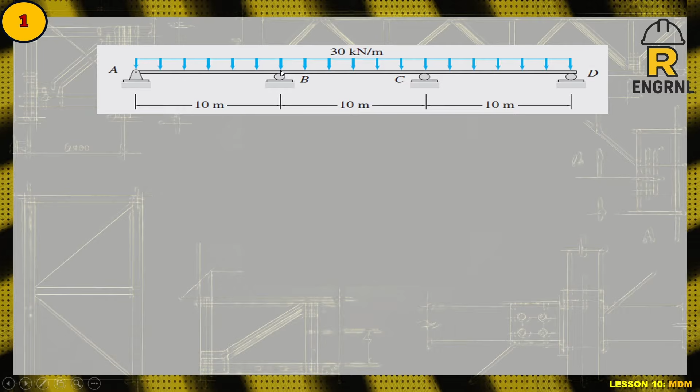This is called moment distribution method. Kagaya ng three-moment equations, ang goal niya is to evaluate or calculate the reactions at the supports. Diba? Sa three-moment equations, kinukuha muna natin yung mga moments at specific point kung saan may redundant tayo, kagaya ng point B na to and point C. Kinukuha natin yung moment dyan, tapos saka natin na kukuha yung mga reactions, support reactions. Maybe a fixed support at the end or both, no? Okay, so kung gusto nyo balikan yung method natin, three moment equation, nasa channel lang po.

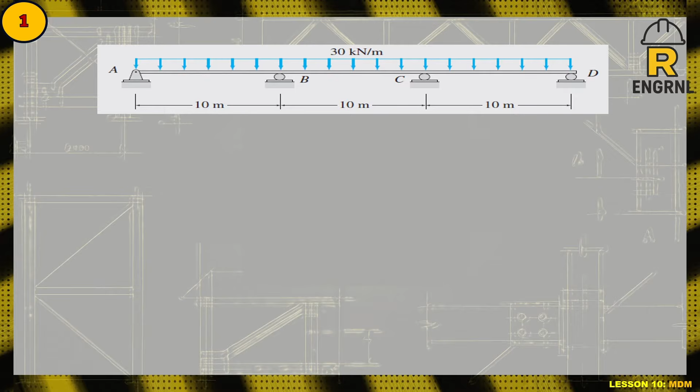So paano naman ang MDM? So this moment distribution method is an iterative method. Ibig sabihin, may portion na paulit-ulit na ginagawa dun sa pag-analyze, no, ng continuous beam. Paulit-ulit na ginagawa yung portion ng pagki-carry over at pagbabalance ng moment.

So this is considering only their bending deformations. Okay? Ibig sabihin, more on the moment lang ito. Saka tayo kukuha ng reactions.

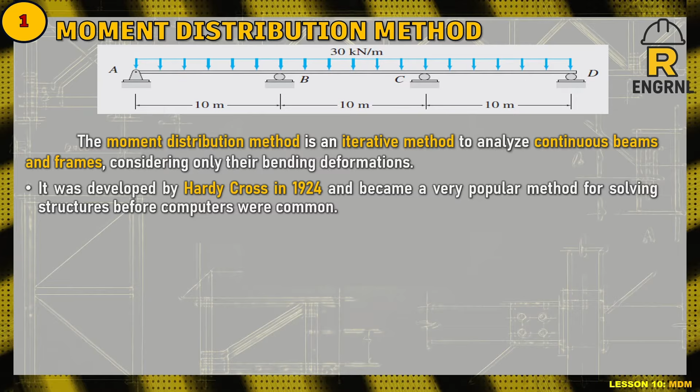It was developed by Hardy Cross in 1924 and became a very popular method for solving structures before computers were common. So from 1930s to 1960s, engineers used this method a lot because it was simple and did not require solving many equations. Okay? Simple lang daw. And when computers became widely used in 1970s, engineers started using matrix methods instead. However, the moment distribution method is still useful today, especially for small structures, preliminary designs, and for checking computer results.

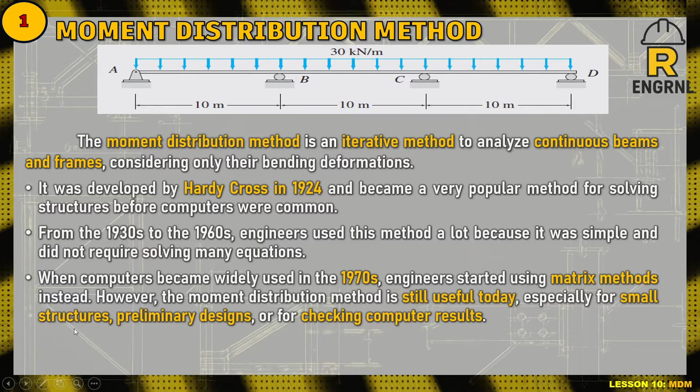So sinasabi lang dito na nagsimula talaga sa manual calculation. And this found na mas madali before, no? And the convenience niya is making it useful until now for small structures. Makikita nyo mamaya kung bakit.

So this method is easier because it avoids solving many simultaneous equations. For beams and frames without sidesway, no simultaneous equations are needed. For frames with sidesway, only a few equations are required. Pero po-focus muna tayo sa beam, no? So later na yung frames.

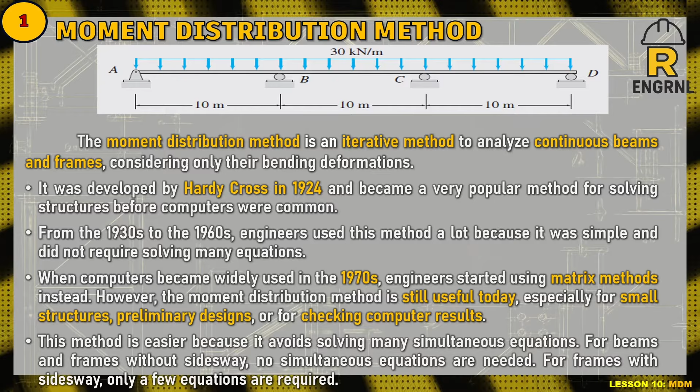Ngayon, ginagamit to manually noon, no, nung pag-analyze ng isang buong building sa frame per frame talaga, no? So makuha lang natin yung mga moments, yun na yung pinakamahalaga dun eh. Makakakuha na kagad tayo ng reactions. Pero may mga specialized technique dito sa moment distribution as the concept flows po, no? Bakit tayo nakakakuha ng moment?

So let's begin with sign convention, of course. Hindi pa rin nagbabago yung sign convention natin like three-moment equation. Susundan pa rin natin na the counterclockwise member end moments are considered positive. So this is in accordance with the Aslam Kassimali book, no? Na doon tayo sanay eh.

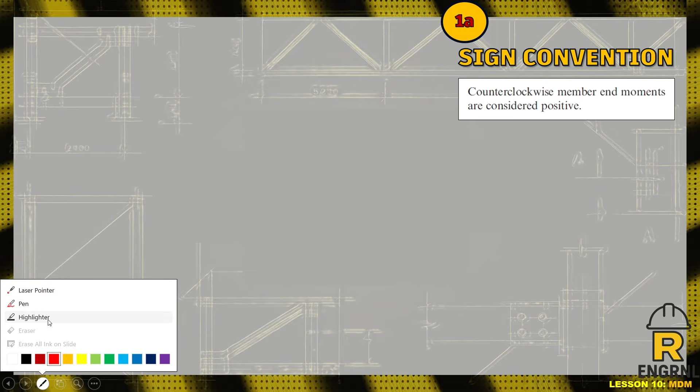The left hand will give you, if you get the left hand, diba? Kuha ka ng left hand member. So ito yung counterclockwise to be positive, no? So kung right hand member naman, mapupunta siya sa clockwise positive naman siya dito. So kapag nakakuha ka ng negative moment sa redundant point, ibig sabihin, clockwise lang yung mangyayari. No? So ganun yan. Okay?

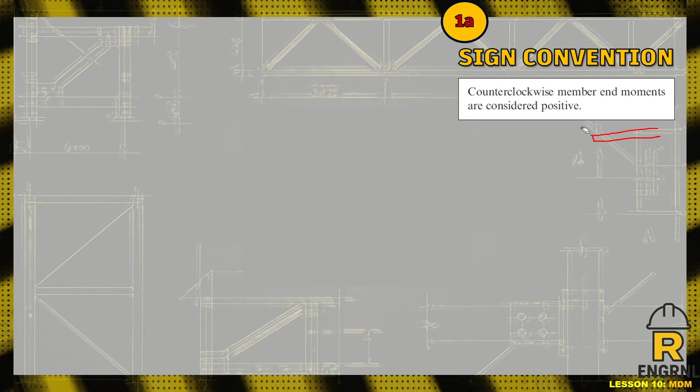And next, yung mga terminologies na ginagamit sa MDM. So unahin na natin yung fixed end moments. So nakaka-solve na kayo nito nung time pa ng Mechanics 3 or yung strength of materials, no? Na kapag ang support ay both fixed, no, may mga certain equivalent moment na yan. So na-solve na to using different methods. Para mas mapabilis ang solution natin, kabisaduhin na lang natin yung magiging moments sa left and right ng fixed end moments, no? O fixed end support.

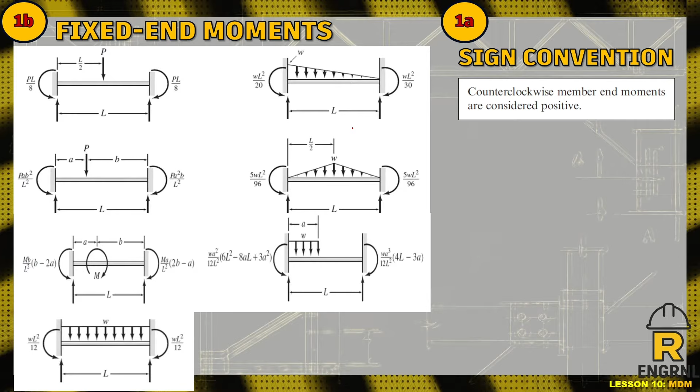So lahat ng itong fixed end moment ay magagamit natin because of the concept ng MDM, diba? Tinitreat muna natin na naka-lock on or naka-restraint lahat ng supports. Kung continuous man yung beam, lahat ng support, lahat ng span ay naka-lock or naka-restrain. And then kapag na-restrain na natin, typical, makakakuha tayo ng moment per span. Tapos i-distribute natin yan sa bawat support. So yung tinatawag na distribution is coordinated with the member stiffness. Ano naman ang member stiffness?

So, for demonstration, we have a span with a hinge at the end and fixed at the right. If we apply a load such as a moment, it will bend like this. There will be a slope at the hinge, with a rotation at A, or slope at A. So there is a moment transferred to the other support.

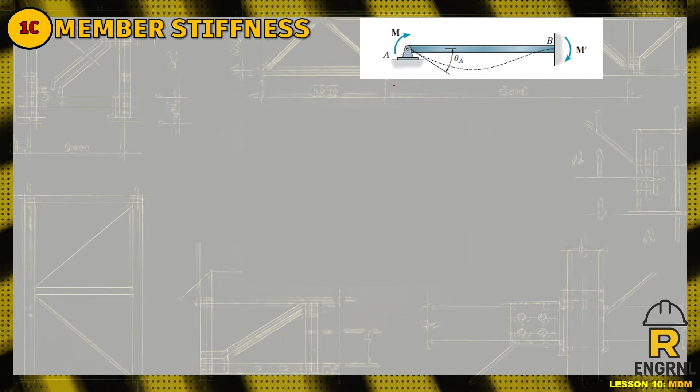Due to its rotation, the member has stiffness. When we solve this using the slope and deflection method, this is what comes out. The K now, which we call the relative stiffness, is 4EI over L. We already solved that using the slope and deflection method, so just check the previous topics in our book.

So we just remember this 4EI over L: when the point of focus is a support, like at A, the far end is fixed. That means the one next to it, whether to the right or to the left, is far end fixed, according to its definition in member stiffness.

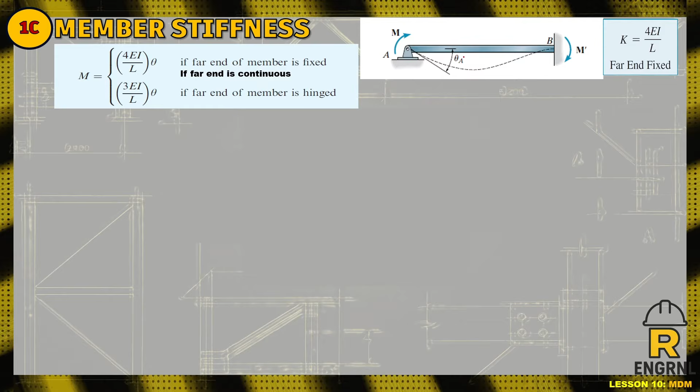Now, to simplify the formulas further, we have M, which is member stiffness, equal to two cases. So if we derive the stiffness of the member, all far ends of the member that are fixed use 4EI over L. Then we multiply it by theta, which is this slope.

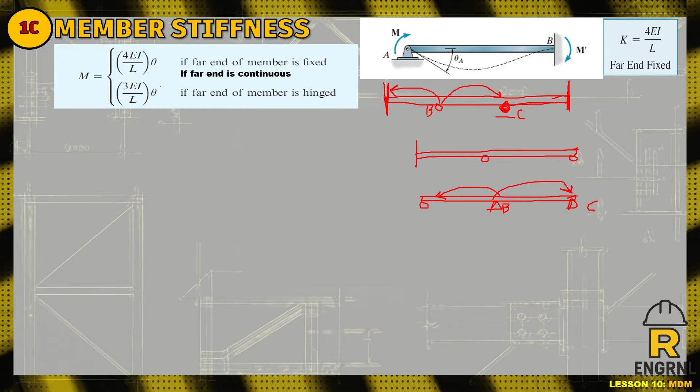So we also have what is called relative stiffness, or the member stiffness, K bar. When we set theta as 1 radian, that means the slope just cancels out, so approximately our theta plays around 1 radian. So it is reasonable to think that this is the same formula.

Now we have an alternative solution to minimize our computation, called the relative stiffness or member stiffness, K. This is the relative bending stiffness. K is equal to K bar over 4E. For example, if we divide by 4E, the 4E cancels out and only IL remains. If we divide this by 4E, it becomes 3/4 IL.

So this is for hinge, fixed, and far end continuous cases. This can work as the alternative approach, while the conventional approach is the member stiffness. There are cases where you'll see only this is actually used, like 4EI over L, whenever we get the stiffness.

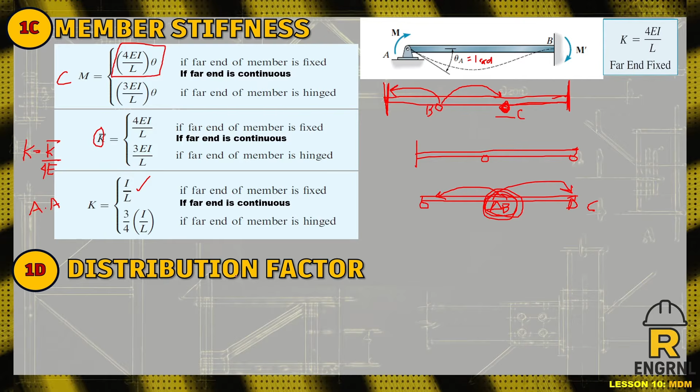So the distribution factor, once we address the member stiffness, once we get K, we distribute it using the concept of the stiffness of one member over the total stiffness at the joint — over the total of the K's below, like in this formula. So the distribution factor tells how the bending moment at a joint is divided among the connected members.

A stiffer member gets more moment and weaker ones get less. So ibig sabihin, yung stiffness na mababa, ang value, maliit na moment lang din yung napupunta sa kanya. Dapat lang kasi nga, hindi siya ganun katigas o kalakas. Parang ganun, so yan lang.

Okay, sasampulan natin yun later. Then lastly, kapag nakakuha na tayo ng fixed end moment kanina, then distribution factor, i-carry over na natin. So sorry, meron pa pala dito.

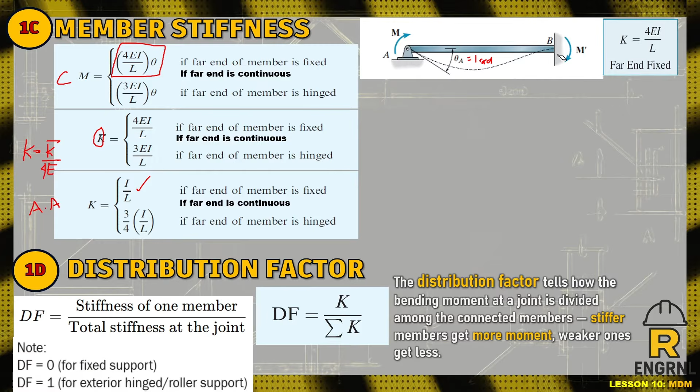Sabi niya, note, the distribution factor at fixed support is 0. Usually at the end yan. Halimbawa dito, sa point B, DF dito is 0 na agad. Pag dito naman, DF for exterior hinge or roller, so this is exterior, so 1 na dito agad ang DF. Pero pag nasa internal, yung mga DF nila sa pair span na magkatabi, pag sinum up mo, 1. Ibig sabihin, it's always 1, no? Sa kada support. Unless it is fixed. Kapag fix, 0. Okay, tandaan nyo.

So next, pag nakuha na natin yung na-distribute na natin yung moment, sabihin na factor na natin, ililipat na natin siya sa support using a carry over factor. So na-derive ang carry over factor using the method derivation, of course. So tandaan mo lang daw na kalahati lang ng moment ang napupunta sa kabilang support. Kapag fix, far end fix, half of the moment. Pag far end of member is hinge, 0. So walang na-distribute. So in short, laging 1/2 ng moment, no? Yun yung COF natin. So ito yung mga common terms or terminologies na nagagamit sa MDM.

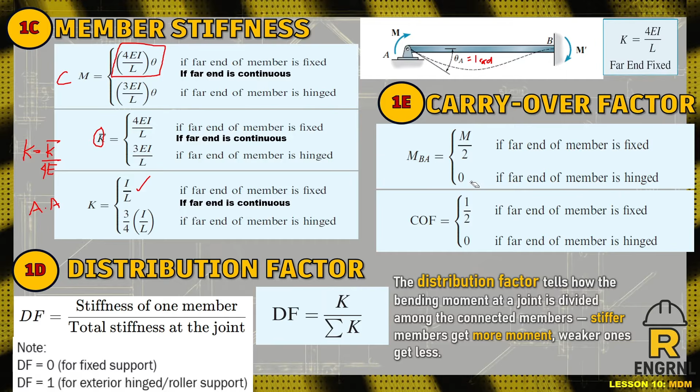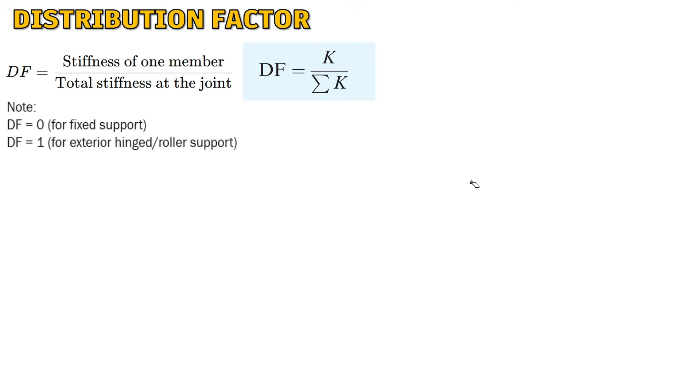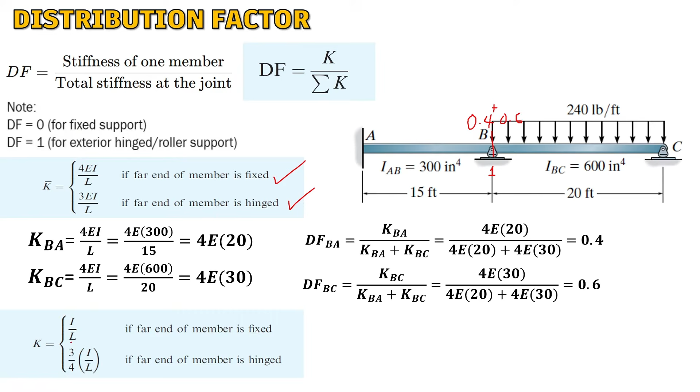As presentation lang, meron naman yung alternative approach na sinasabi natin. If we use the concept na far end member is fixed, or far end of member is hinge, let's begin to use this one, the tinatawag nating relative bending stiffness. So kapag far end fixed, IL. Kapag far hinge, 3/4 IL.

Tingnan mo, so KBA is equal to IL kasi fixed ito. So 300 over 15, 20, di ba? Tapos KBC, dahil hinge nga yun, so 3I over 4L. So yan, I have 22.5, di ba?

Ngayon, if we use the same formula for DFBA and DFBC, so we have this. Okay? And we have this. So yung 0.4 kanina, naging 0.471. Tapos yung 0.6 nabawasan ng konti, 0.529.

So technically, ang mataas ang stiffness is yung IBC kasi mataas yung I niya, mataas yung malaking cross-section niya. Okay? So siya yung mabibigyan ng mas malaking moment. Kumbaga, pero kung i-add mo ito, yung dalawa, is equivalent pa rin sa 1. So nagkakaroon lang ng konting adjustment kapag ginagamit natin yung nire-reduce natin ng 25% yung sa far end hinge, which is naman reasonable naman yan.

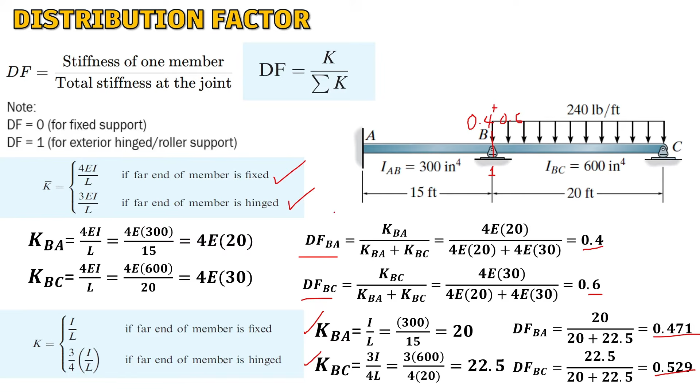So ngayon, to simplify the solution, may mga ginagamit talaga tayong approach na ganito. Okay? So yan yung sa DF portion pa lang, distribution factor. This is part of the solution ng MDM pa lang. So hiniwalay ko na to explain and to give an example for DF, para mamaya tuloy-tuloy tayo. So these are the basic steps in moment distribution method na gagawin natin to the main example. Okay? So pakibasa na lang po ito, paki-pause and read.

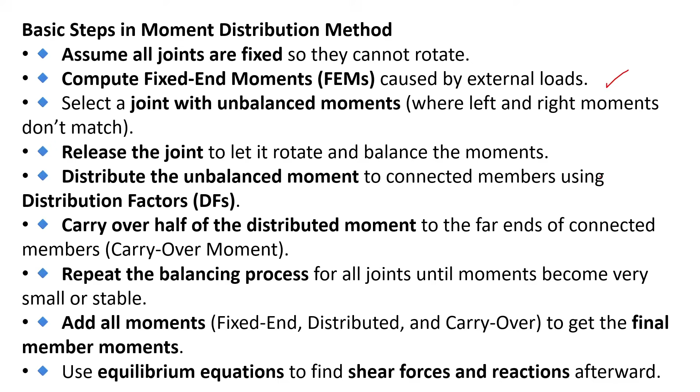Sinasabi lang natin, sa madaling salita, tinitreat muna nating fix lahat per span. Kinukuha ang fixed end moment. Ngayon, select a joint with unbalanced moment, ibig sabihin, lahat ng joint na may unbalanced moment, tapos release the joint. Sabi niya, pag trinit mong fix lahat, which hindi naman lahat actual, di ba? I-release mo naman siya using distribution factor. Hanggang sa paulit-ulit natin ginagawa yung method, kaya nga siya tinawag na iterative. Paulit-ulit na ginagawa hanggang sa mabalance natin yung moment doon sa support na yun, hanggang we came up to a final moment.

Once nandun yung distribution factor, hindi tayo lalayo. Tapos bawat pagbabalanse ng moment, naki-carry over yung kalahati doon sa katabi niya. Until we repeat and repeat the process until all the moments will be added, hanggang sa yun na yung final moment. Okay, excited na ba tayo doon?

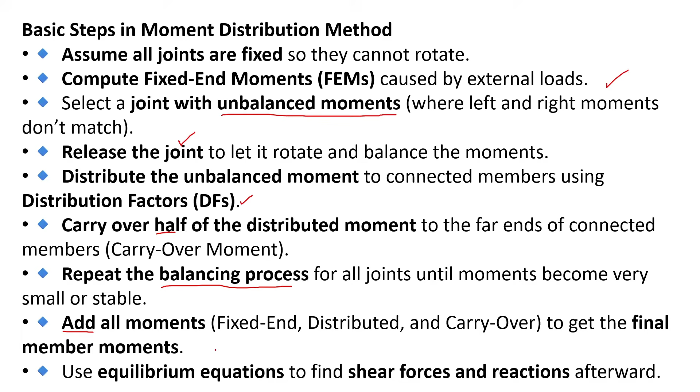So let's begin, for example. So we have fixed support, AC, and meron lang tayong internal hinge dito sa B. So this is indeterminate, of course. EI is constant, tandaan natin. And we have a uniform load and a direct load, which is arbitrarily loading. Kung 3-moment equation ito, pwede naman. Pwede nating masolve to ng 3-moment equation, ha?

Pero what if MDM? So unang gagawin natin is fixed end moment. Tignan natin yung table kung alin yung akma. Pero syempre, dalawa kasi ang span dito: A to B, which is itong load, and then B to C. So ang magagamit ko is itong diagram na to, tapos yung isa ay para dun sa full uniform load. Okay, so let's begin to compute.

Call it FEM-AB. Okay, FEM-AB. So dahil nandito tayo sa AB, moment muna sa A to B. So PAB squared over L squared. Substitute P, 18, 10, 15, and then 25. Okay? Sundan lang, may pattern naman. So it is equal to 64.8 kft.

Punta naman tayo sa B to A. FEM, B to A. Ibig sabihin dito sa right side. So yung una nga pala is positive, positive sa A, counterclockwise eh, di ba? Then 18, 10 squared, 15, and then 25 squared. So we have clockwise, so negative yan, 43.2. O, di ba? Madali lang. Basta sa ulo natin itong diagram na to.

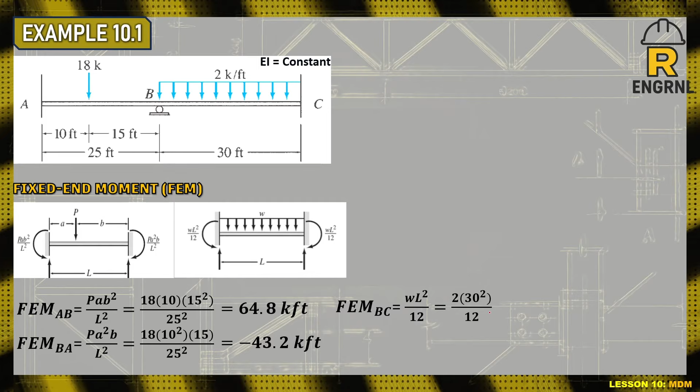Pag uniform load naman ng FEM natin, WL squared over 12. Substitute, 2, 30 squared over 12. Then we have 150, again positive siya. So the other one is negative.

Okay, same naman sila ng result. So, ito yung madali talaga sa ulo. So, meron tayong FEM, sir.

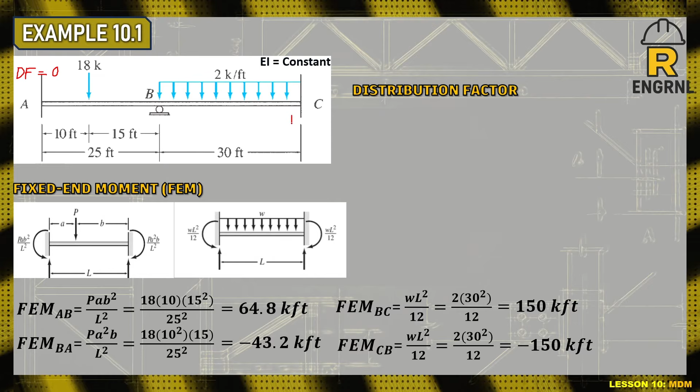Next, distribution factor. So, sa distribution factor, dalawa yan. Sa isang support, if your support is B, meron kang B to A and B to C. If your support is A, fix yan. So, ang DF mo dito, ano sabi natin kanina? Pag fix, 0. Dito naman, DF, pag fix, 0.

Gets natin, no? So, ibig sabihin, gagamitin natin yung distribution factor, kuha muna tayo ng K. So, ang kukuha na natin ng K lang is yung sa B, B to A and B to C. So, gamitin natin yung alternative approach.

Okay, IL far end fix. I over 25, tama po ba? Let I be I, kasi constant naman yung I eh. Over 25. Pag may binigay namang I, halimbawa I is 60 inch to the 4th, kahit may binigay siya, makakancel lang din yan later. Hayaan nyo lang muna I yan.

So, next, kay BC is I over 30 naman. Tama, di ba? Kasi ang L dito sa BC is 30. And let's now use the DF formula. DF is K over summation of K. So, KBA muna tayo, KBA over KBA plus KBC. Substitute lang, I/25 over I/25 plus I/30.

So, we have 0.545. Okay? DFBC, okay, substitute natin, KBC is I over 30. So we have 0.455. Okay? Dapat pag sinum up mo yan, should be 1.

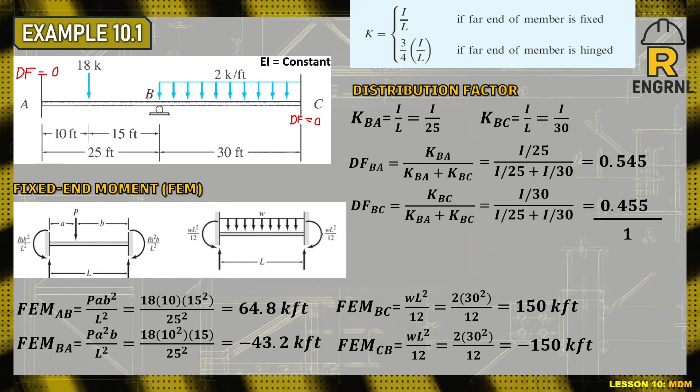So, next, actually, may distribution factor ka na, tapos ka na doon. Ngayon, pupunta na tayo sa concept ng carry over. Magki-carry over, magbabalance ng moment, magki-carry over, yun. So, ito na talaga yung MDM. Preparation lang tong dalawa eh, yung FEM tsaka distribution factor.

So, yan, ito na nga siya. Tara, so gagamit tayo ng lamesa, ay hindi, table, okay? Table na ganitong type. So, since sinasabi nga natin kanina na iterative, yung moment distribution method, may mga table kayo makikita kung manonood kayo sa ibang channel o gagamit kayo ng ibang book na medyo malapad yung mga table nila.

Tapos paulit-ulit yung nakikita yung balance, yung word na balance, tapos yung COM. Sabihin ng COM, carry over moment, yung naki-carry over. So, balance, carry over moment, and then susunod na lang, balance, carry over moment, balance, carry over moment. Sunod-sunod. Tapos, ang nangyayari, sinasum up lahat ng moment sa bawat dulo.

Yun. So, sa sample na to, dihamak na maliit lang yung magiging natin, table natin. Kasi, agad-agad makikita nyo, 0 na kagad kasi yung fix dito. 0 na rin dito. So, hindi marami yung natin i-distribute. Kumbaga, nasa point B lang yung focus natin.

Try nyo tignan. So, isalagay natin dito, sa left side, yung DFBA. Dito naman sa right side, yung 0.455. So, kumbaga, ito yung representation dun sa support B. Dito yung sa support A, and dito yung support C. So, makikita nyo, dapat may moment yan sa dulo.

Ano yung magiging moment mo ngayon sa A? Ano yung magiging moment mo sa B? At ano yung magiging moment mo sa C? O, nakikita nyo na ba yung sagot? Yan talaga yung magiging mangyayari.

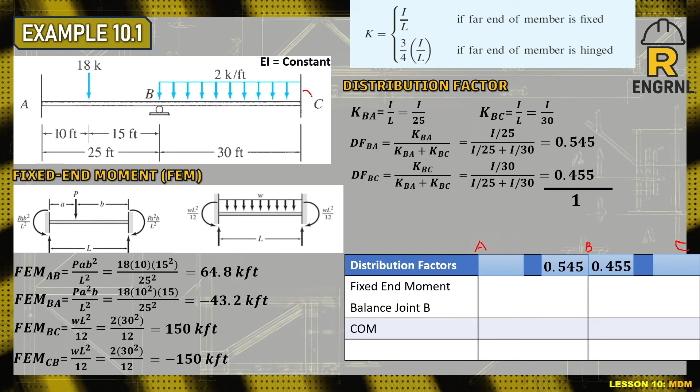Kasi, di ba to, sa totoo lang, may reaction talaga moment dito. May reaction na moment dito. At saka mayroong moment dito. So, ganito siguro yun. Ganyan natin yan makikita mamaya. And later on, you will get the reactions here. So, parang 3 moment, kaya lang, ganito yung way ni MDM.

So, now, sa table, pagkatapos mo ilagay yung DFs, may nakalimutan pa tayo, DF pala sa A. Ayan, 0, 0. DF sa C, 0. DF sa A, 0. Ayan. May rason yan kung bakit ganyan ang ayos, ha?

So, fixed end moment. Pwesto na natin yung mga nakuha natin. Dito sa FEMBA, B to A, negative 43.2. Tsaka, dito naman is positive 150, yung FEMBC. Ayan siya. Tapos sa kabila, yung positive 64.8, FEMAB. And then sa kabila, yung negative 150.

Okay? So, balance joint B. Tingnan naman ang balance joint B. Ito na yung simula ng ating proseso. Kung titignan mo, hindi balance yung moment sa B. Hindi mo i-accept agad-agad yung fixed end moment.

Okay, makinig kayo sa explanation ko ha. Ito na yung ano niya, nasa climax na tayo kumbaga. Sir, bakit hindi na lang kaya natin gamitin yung fixed end moment na na-compute natin initially? Hindi mo gagamitin yan kasi hindi talaga yun yung actual na nai-experience ni Beams. So, trinit natin per span na restrained o nakalock sa umpisa kasi yun yung mas madaling way to solve the moments. Pero sa totoo lang, sa actual position, hindi talaga sila nakalock.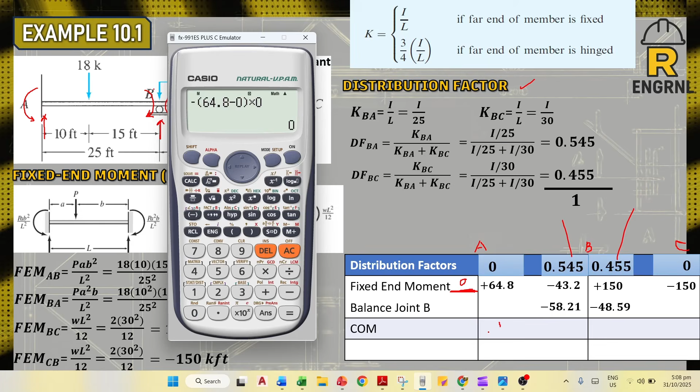So wait lang, i-perform naman natin yung 64.8. Kung titignan naman natin yung 64.8 at saka yung katabi niya, for example may katabi siya. Kung gagayahin natin yung ginawa natin sa B, 64.8, sorry negative pala, negative of the 64.8, ganun lang yan minus 0, difference of imbalance, times your distribution factor, which is 0. O di 0, yun lang yun. Ibig sabihin kapag distribution factor mo lagi 0, 0 lang din yan.

Saka mo ngayon i-carry over. Maki-carry over tayo, punta tayo dito sa kabila ng kalahati ng 58.21. Negative 29.1, kasi carry over mo yung 0 dito, divide mo ng 2. Ay sorry, yung kabila naman muna pala. Ayan, negative 48.59, negative 24.3. Tapos yung 0, of course 0. And then 0, half of 0 is 0.

Yan, ganyan lang. So paulit-ulit natin gagawin yan, hanggat meron pang imbalance doon sa joint na chine-check natin. So dahil nakikita natin 0 naman na ito, wala nang ibabalance, yan na yun. Yan na yung sagot.

So as the steps go, i-sum up na lang natin lahat ng moments na na-compute natin sa bawat sides. So we have the final moments. What I mean is, 64.8 minus 29.1, we have 35.7. Dito naman, negative 43.2 minus 58.21 is negative 101.41. Next, positive 150 minus 48.59 is 101.41. And negative 150 minus 24.3 is negative 174.3.

O, di ba? Ano napansin nyo? Pagdating sa joint B, dalawa ang moment, yes, pero dapat parehas silang value at magkaiba sila ng sign, kasi oppositely directed sila with the same magnitude dapat nalalabas. Nakukuha nyo na, so nakikita natin. It is like a span, both span, na ginawa natin ng specialized table for MDM.

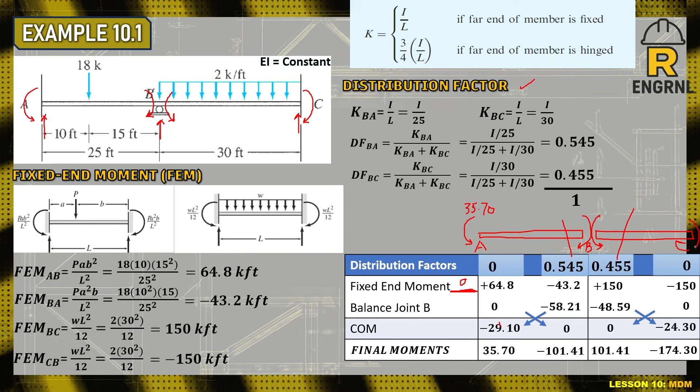So the actual moment pa lang na experience ni A is 35.7. Sorry, positive pala yan. So ibig sabihin, positive 35.7, ibig sabihin ang ano natin, ganyan. Then dito naman, ganyan, negative eh, clockwise. And then positive dito, counter. And then negative dito, clockwise. Yan, ganyan siya, so pwede mo na siyang kuhanan ng reactions.

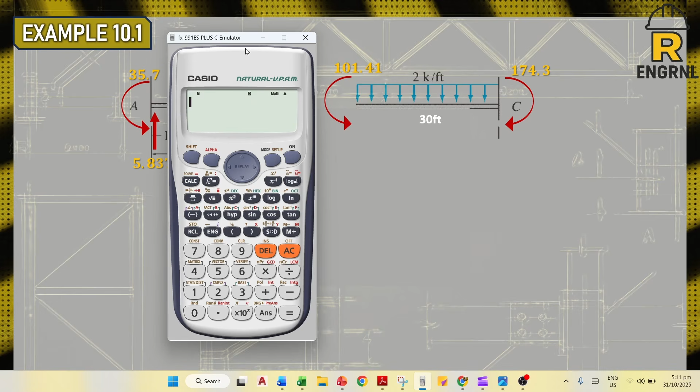Clockwise positive muna, so let x times 25, moment arm. Then another 101.41, okay, and then minus 18 times 15, and then minus 35.7, so equals 0. Solve, yan.

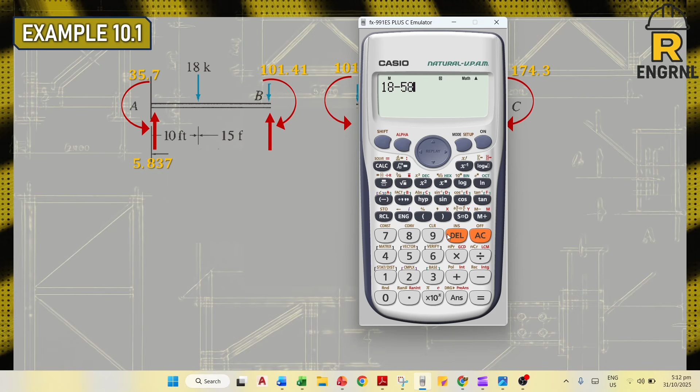So 5.837. Summation forces y, you can get na the force at B. So, like, 18 minus 5.837. Yan, so check natin, yan.

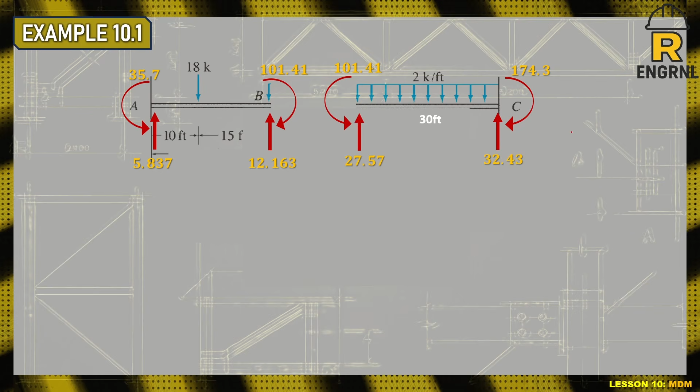So ganun din gagawin mo sa kabila, hanggang sa makuha mo to, and ito. So yan yung final results. Support reactions, here. Actually pwede mo rin isolve yan ng three-moment equation at try mo kung makuha mo din yung sagot na ganito.

Pero initial example ko lang ito ng MDM and mas magigets natin to sa mga susunod pa. So cut muna natin dito at intindihan muna natin yung konsepto. Rewind lang natin yung video kapag medyo nagugulan tayo.